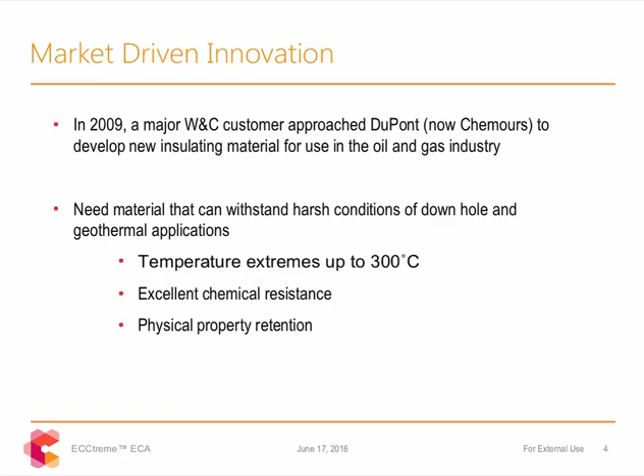So what exactly is ECA? What am I going to talk to you about today? ECA is a new high-temperature perfluoroplastic material known as an Epitaxial Co-Crystallized Alloy, or ECA, and is recognized by UL as a new class of perfluoroplastic material with an upper continuous use temperature of 300 degrees Celsius. Much like FEP, PFA, and PTFE are classified as different materials under UL, ECA is its own class of perfluoroplastic material. In addition to the highly beneficial properties found in typical perfluoropolymers, ECA's unique thermal properties allow it to withstand harsh environments at high temperatures for extended periods of time, breaking the 260-degree ceiling of traditional materials.

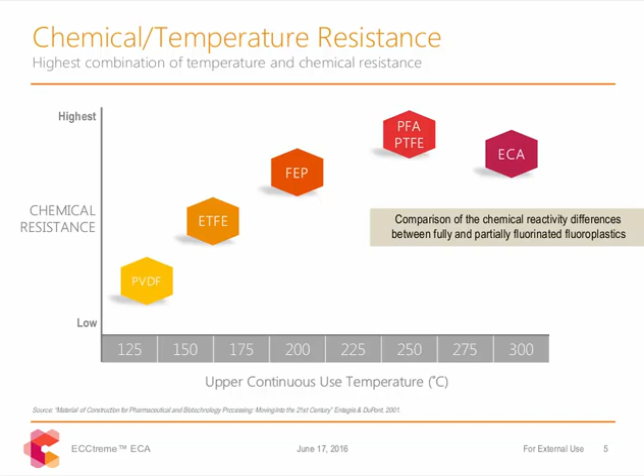So that's an example of what the material is, but why was it developed? I mentioned back in 2009, a wire and cable company came to us with this need, but holistically, starting back in the 1930s with the discovery of PTFE, fluoroplastic technologies have evolved over time to meet the growing needs of many diverse industries, oil and gas being one of them, the semicon industry, aerospace industry. With current technologies driving the need for materials that can survive extreme environments and perform at high temperatures upwards of 300 degrees, it was clear that a new perfluoroplastic material needed to be developed. This is what led to the invention of ECA in 2011.

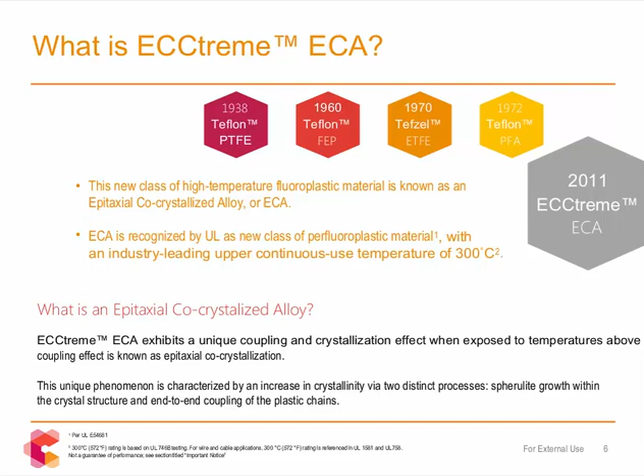Why is ECA different than other materials? Unlike other fluoroplastic materials, ECCtreme ECA undergoes a unique coupling and crystallization effect when exposed to temperatures above 280 degrees Celsius. This effect is known as Epitaxial Co-Crystallization. This unique phenomenon is characterized by an increase in crystallinity via two distinct processes: growth within the crystal structure itself and end-to-end coupling of the molecular chain.

At an MFR of 7, ECCtreme ECA 3000 was the first product developed in the ECA family of products. We have since introduced a full MFR range of materials to the ECCtreme product offering, designed to meet various molding and performance needs in many different applications. UL has recognized ECA with a yellow card for 300 degrees Celsius, which actually allows it to achieve the highest relative thermal index value in UL's plastics components database. ECA 3000 and 4000 have both earned this yellow card. ECA 2000, which is our newest material introduced into the product line, is pending certification.

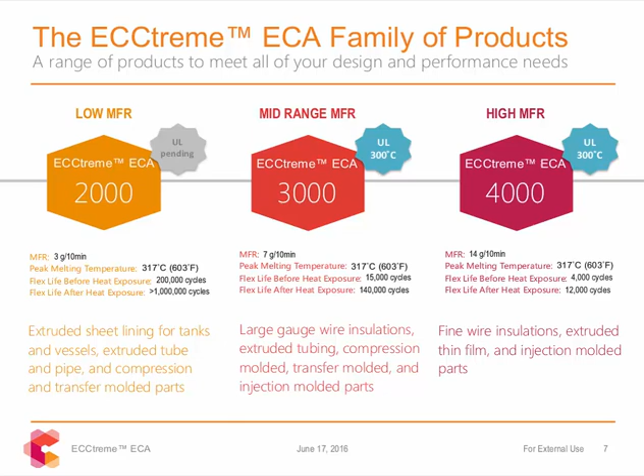As I mentioned, in addition to ECA's high temperature properties, it also has the same beneficial properties you expect from a typical perfluoroplastic, with some properties that actually outperform other melt processable materials. An example here is ECA's superior abrasion resistance compared to PFA, which is just one instance of properties where ECA exceeds other melt processable materials.

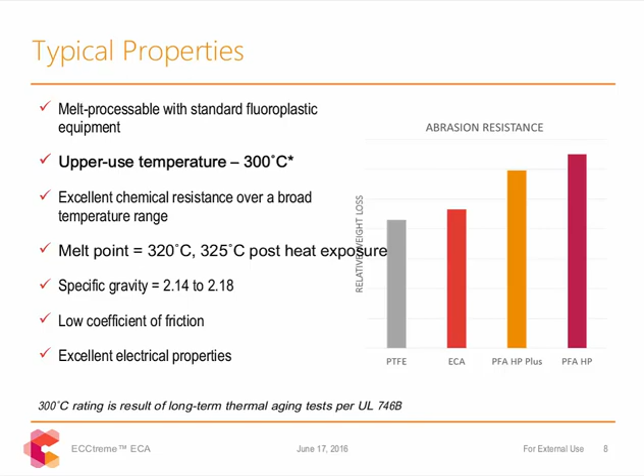So typical properties: it's melt processable with standard fluoroplastic equipment, extrusion, injection molding machines, excellent chemical and temperature resistance, low coefficient of friction, excellent electrical properties. Again, all of the kind of standard properties you come to expect from using a fluoroplastic material.

Now I'm going to go into some detail and give some examples of ECA's unique properties and superior performance in extreme conditions. Unlike other fluoroplastics, ECA doesn't break down during exposure to extreme heat for extended periods of time. In fact, in some instances, we've observed increased physical property performance after heat exposure.

So how do we observe the mechanism behind this increase in performance? We can observe the co-crystallization phenomenon I described earlier by monitoring a drop in melt flow rate after heat exposure. Unexposed ECA, ECA 3000 for example, has an MFR of 7, which will drop to less than 1 following heat exposure. ECA 2000 and 4000 demonstrate similar trends when exposed.

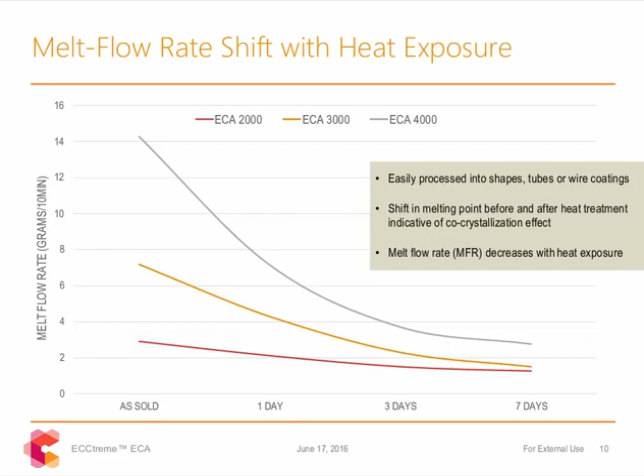Interestingly, also unique to ECA is that typically an increase in crystallinity can lead to brittle or rigid material that can be prone to stress cracking. ECA actually, when exposed to heat, the MIT flex life of the material improves over time. Here is an example in ECA 4000, which demonstrates over 1,000% increase in flex life over 7 days of 315 degree C heat exposure.

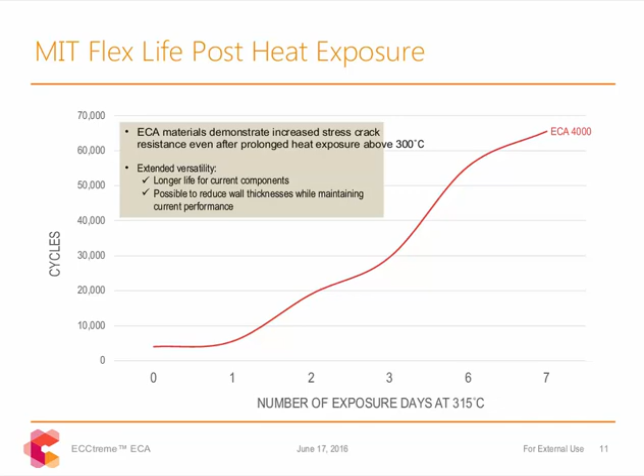And what does this mean in an application? It means longer life for components, and it means the possibility in wire and cable applications to reduce wall thickness while maintaining performance. One of the most interesting features of this material is that after almost 2 years of constant 315 degree C heat exposure, there is virtually no change in tensile modulus.

At the beginning of our development of this material, compression molded ECA plaques were placed in a 315 degree C air convection oven and sampled monthly for retention of physical properties. Though tensile and elongation measurements did gradually trend downward over time, the material shows limited drop in tensile strength and virtually no change in tensile modulus.

It should also be noted that these thermal aging studies were performed at 315 degrees, which is 15 degrees above the continuous use temperature rating granted by UL. This limited drop in tensile and elongation is very impressive considering the conditions this material is being exposed to.

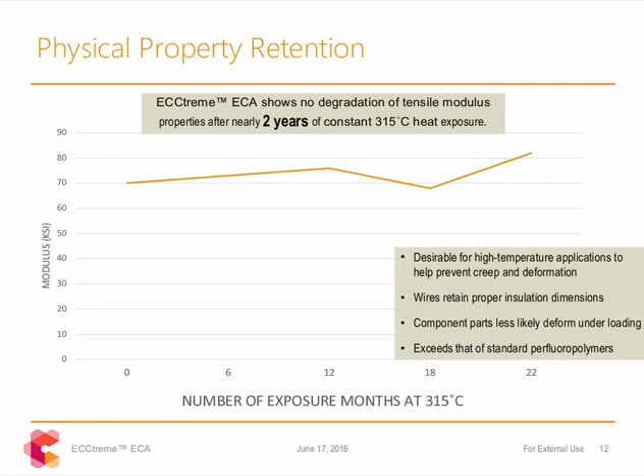Again, as I mentioned before, this material was initially developed for the wire and cable industry, so it was important that it maintain the same levels of electrical performance as incumbent fluoropolymer materials. And so I'll now give some examples of electrical performance for ECA.

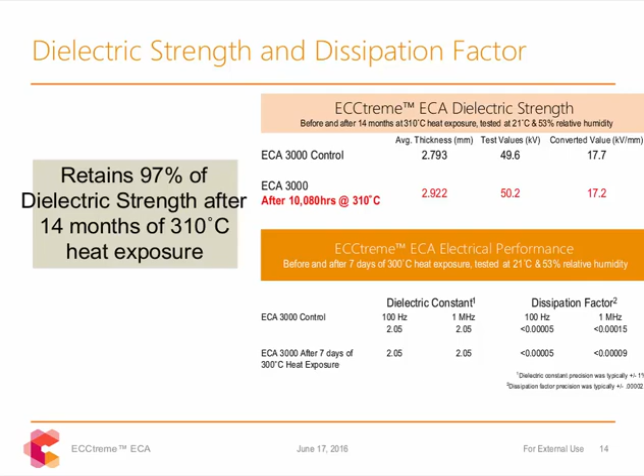It has a dielectric constant similar to other melt processable perfluoroplastics and a dissipation factor that is lower than standard PFA, though not quite as low as PTFE, which is known to have some of the best electrical properties of any fluoroplastic material. And again, just like its retention of physical properties, after 14 months of 310 degree C heat exposure, 10 degrees above its intended upper use temperature, ECA retained 97% of its electrical properties.

While high temperature resistance and physical property retention are obviously critical properties for an insulating material, resistance to chemical exposure and permeation is paramount in many high temperature applications like downhole and geothermal. So we also have some data to share showing ECA's superior performance in chemical applications as well.

Along with evidence of excellent general chemical and steam resistance, ECA's unique co-crystallization effect, which I've mentioned a couple of times, increases the permeation resistance of the material, giving it the ability to outperform some PTFEs and low permeation PFAs. An example shown here is exposure to concentrated HCl, hydrochloric acid, at elevated temperatures. HCl is a well-known permeant of fluoropolymers, and compared here to our Teflon PFA product line, well known for industry-leading permeation resistance, ECA actually performs as well or better than these leading materials.

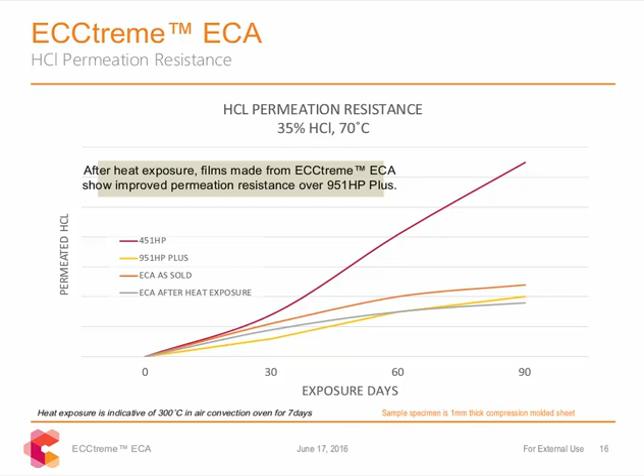We were even honestly surprised by the performance of ECA when compared specifically to our 951 HP Plus product line, which is known specifically for its resistance to permeation from HCl. Another example of ECA's resistance to gas permeation is shown here, shown to outperform both PTFE and again 951 HP Plus, both before and after exposure to heat. So you can see here the increase in relative permeation resistance compared to other industry-leading materials.

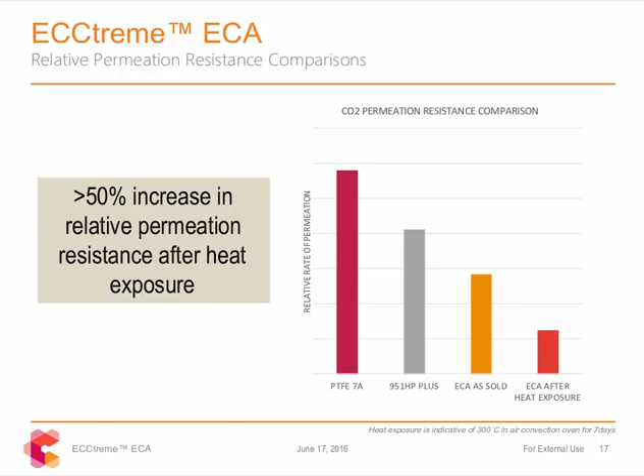And we have data that shows similar trends for nitrogen, for oxygen, and water vapor permeation as well. Over the last few years, we have done exhaustive research exposing ECA to different chemical systems at various temperatures and pressures, including hydrochloric acid, hydrofluoric acid, HF, sulfuric acid, ammonia, nitric acid, high-pressure steam, and diesel fuel at different temperatures and pressures. Like shown here is exposure to diesel fuel at 300 degrees Celsius and 5,000 psi for 2 weeks.

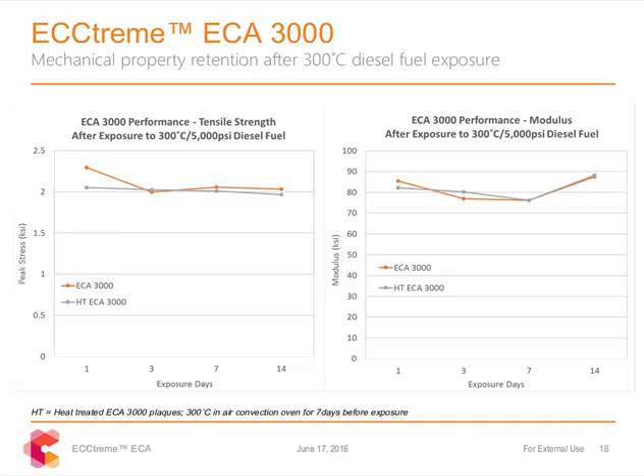Like all fluoropolymers, of course, ECA does show some limitations at certain temperatures and pressures in different exposure systems. But overall, we have observed a retention of physical properties in ECA that's unlike any other melt-processable fluoroplastic performing at these temperatures. So again, here you can see that in high-temperature, high-pressure exposure to diesel fuel, both ECA and ECA that has been exposed to extreme heat show little to no effect on tensile strength or modulus over the span of 2 weeks at pretty extreme conditions.

So discussing properties, performance is all well and good, but what does this mean for applications? Where can we put these properties to use? Why is this beneficial specifically to the wire and cable industry? ECA, in the grand scheme of things, is still a relatively new material, but we have validated that it can be processed by all standard means of processing fluoropolymer material. So wire and cable extrusion, tubing, compression molding, injection molding, film and sheet extrusion, and transfer molding. It's also been successfully compounded with various fillers, like carbon fiber, carbon black, fiberglass, mica, Kevlar, ceramics, different colorants, and titanium dioxide.

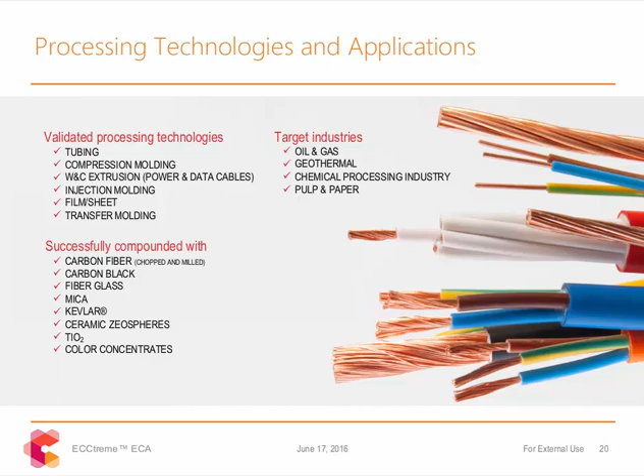Based on what we have observed in this highly unique material, the industries we think would benefit most from its unique properties are applications specifically where high temperature performance is paramount and some degree of chemical resistance is also needed. The major industries that come to mind in instances like this are oil and gas, geothermal, the chemical processing or CPI industry, and pulp and paper production. ECCtreme ECA offers great potential to expand the range of current applications for perfluoroplastics, as well as open up opportunities in new and unexplored markets.

From a wire and cable processing perspective, we see opportunities for new applications across a range of rheological requirements. The development of the ECA product family, again, which is the ECA 2000, 3000, and 4000, continues to show enhanced modulus retention, improved fatigue and permeation resistance, covering a wide range of melt flow needs, while continuing to be melt processable using standard operating conditions and standard fluoropolymer processing equipment.

Some new applications that we've seen involve insulation ranging from as low as 2 to 10 mils on 40 gauge to 16 gauge wire up to 75 mils of insulation in larger downhole applications. We have seen industries and applications such as downhole submersible pumps, automotive block wire harnesses, data instrumentation cables, carbon-filled heat tracing cables, different carbon fiber compounds, and tubing have all shown to be promising vehicles for ECA and its unique properties.

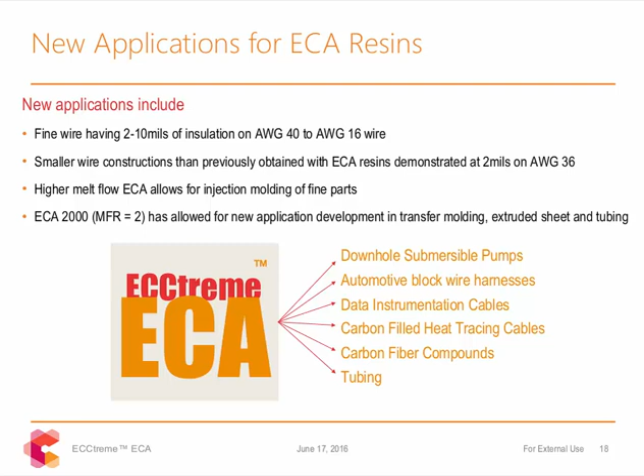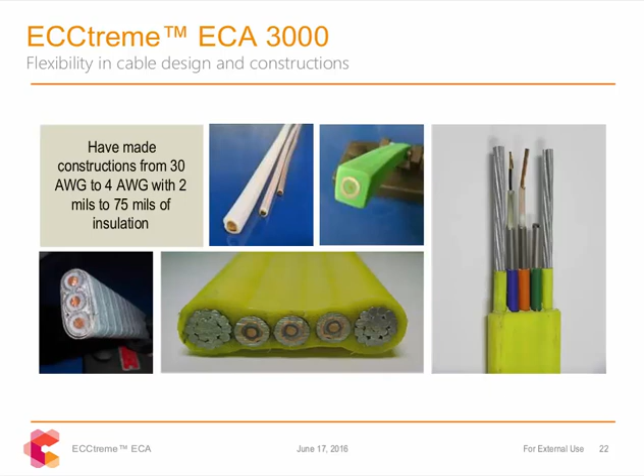So here's some photos and some examples of ECA in some wire and cable applications. So it's an incredibly versatile material that can be used for heavy gauge data logging cables with up to, like I said, 75 mils of insulation. There's a couple photos here. And this is the ECA 3000 material. So this is the lower melt flow material for wire and cable applications around an MFR of 7. And then we have also used our ECA 4000 material with a melt flow of 14 for fine wire applications like thermocouple wiring, ranging from 2 to 15 mils of insulation. So a wide range of applications that we are seeing benefit from the properties that ECA brings to the table.

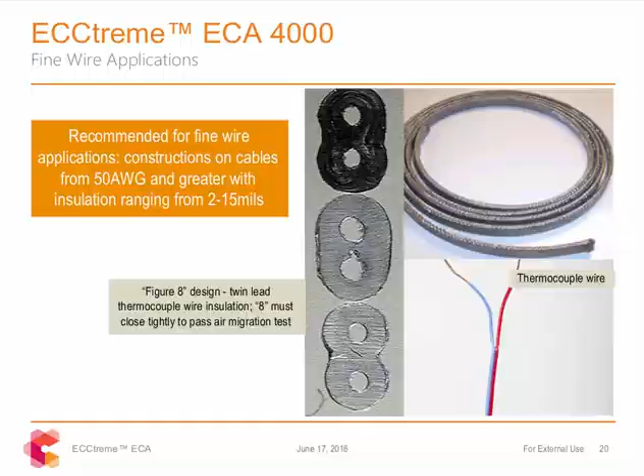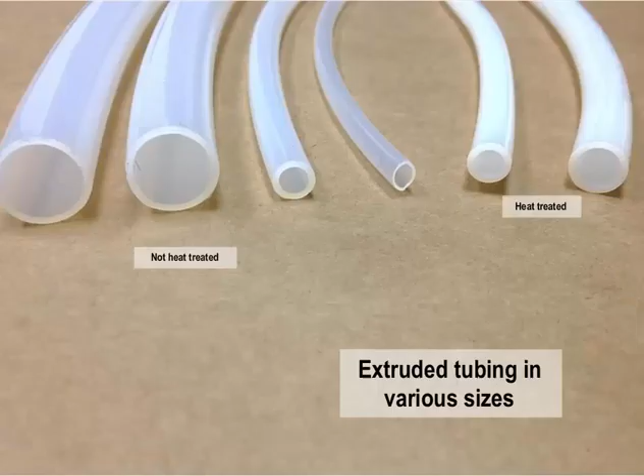So here's just a couple of non-wire and cable applications. ECA has also been successfully, like I mentioned, compression molded, extruded into rods that can be machined into stock shapes, used as gaskets and sealing materials, as well as tubing. Here's a photo of a couple of different sizes of tubing made from ECA.

So those are just a few examples. I talked in the beginning about the need for new materials based on the performance needs of these different markets and different applications. And as it has in the past, new markets and increasingly demanding applications will continue to drive fluoroplastic technologies forward. And we personally are very excited to have Chemours, Teflon, and ECCtreme ECA be a part of that continued progress.